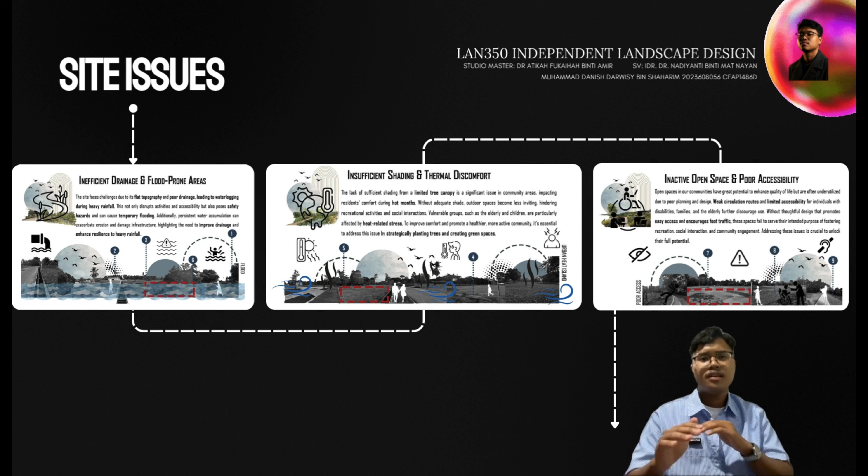Second is insufficient shading and thermal discomfort. The highly limited existing tree canopy leaves community spaces exposed to extreme solar radiation, creating an urban heat island effect that causes heat-related stress to vulnerable groups like children and the elderly.

Third is inactive open space and poor accessibility. Due to a weak historical circulation layout, this public field remains heavily underutilized. The total accessibility for the design feature is neglected for people with disability, preventing this site from fulfilling its social potential.

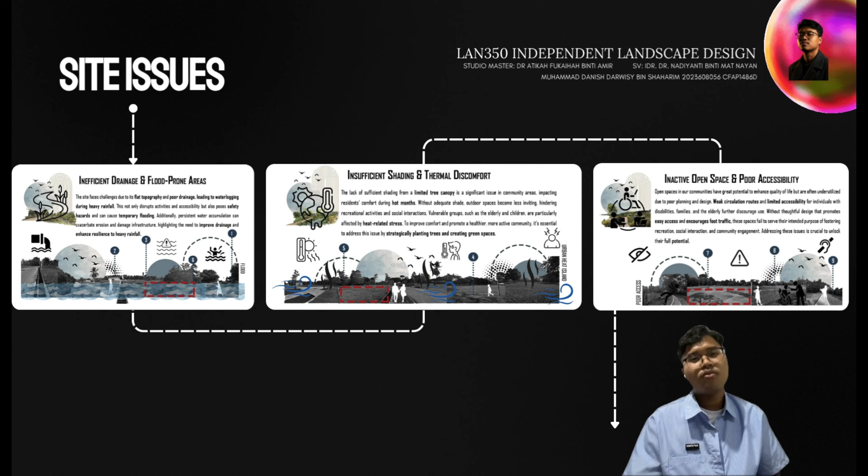Contextualizing these issues, let us look at the site's macro environment. Taman Ujana Peremba is a vital civic open space situated 850 meters from Billion Alor Setar, 450 meters from the Founding Memorial, 400 meters from Masjid Nur Iftikar, and 1.8 km from SMK Ampang.

Demographically, it serves the wider catchment region, which holds an estimated population of 179,200 people. The community makeup is constant at 49.2% male and 50.8% female residents, with ethnic distribution of 72% Malay, 22% Chinese, and 2.4% Bumiputera. Understanding this demographic analysis is critical to why revitalizing this space into an inclusive civic park is so important.

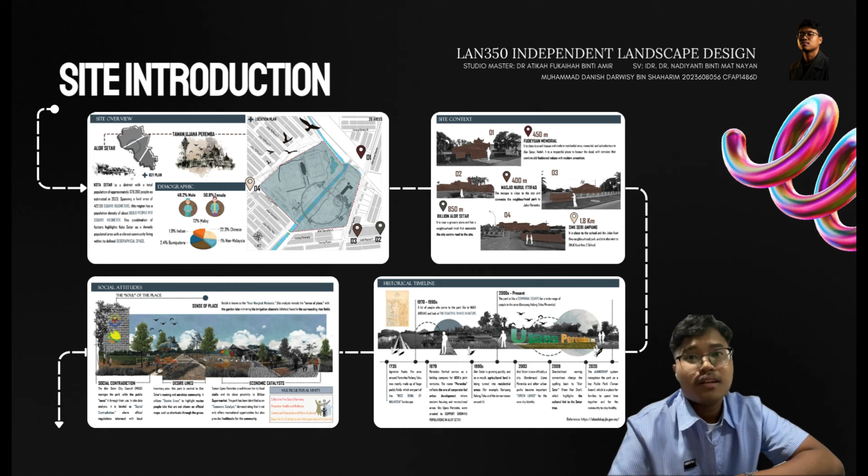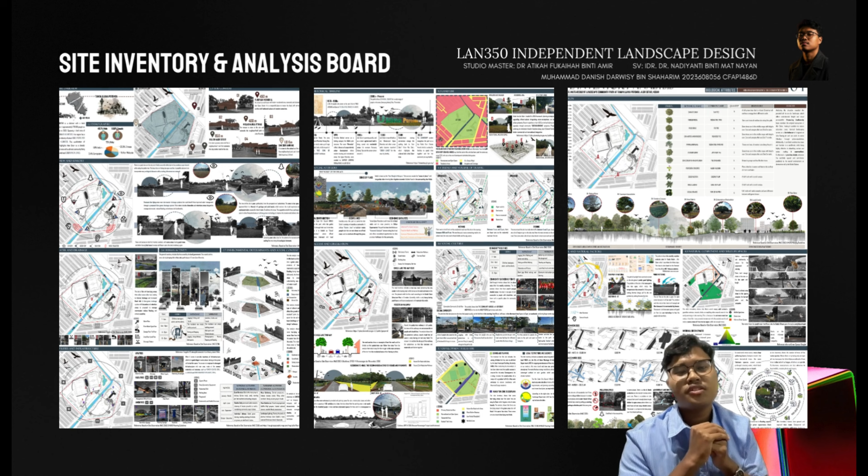Evaluating our site inventory through a structured SWOT analysis, we clarify the design parameters. Strength: the site boasts excellent mature vegetation, including prominent rain trees that provide immediate shade, forming a strong foundation of a forest framework, while an adjacent river canal provides a distinct waterfront identity.

Weakness: internal vulnerabilities include a failing drainage network that cannot handle high surface runoff, causing structural waterlogging, alongside pockets of dead or diseased trees that deteriorate public safety.

Opportunity: we have a major opportunity to integrate nature-based solutions (NBS) and climate resilient technologies, transforming the space into a foundational water education park to raise community environmental literacy.

Threat: external threats include intense monsoon flooding that could destroy park access if not designed to be flood resilient, as well as rising urban heat and insect-borne disease systems.

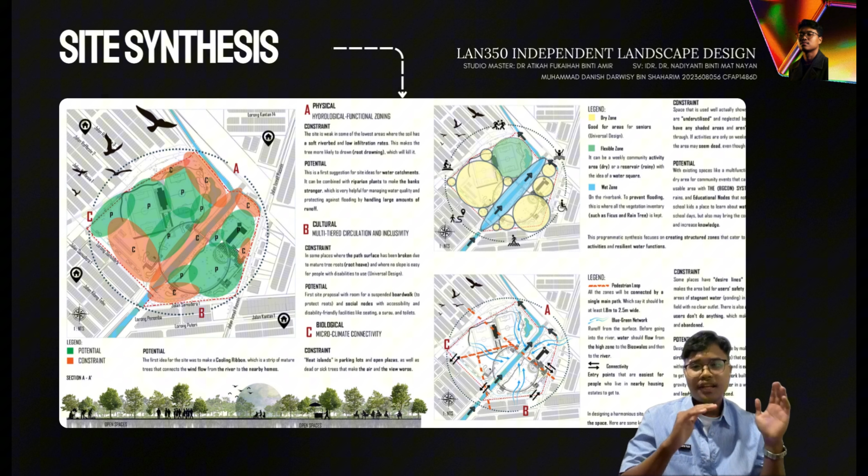Our site synthesis directly bridges this analytical finding with spatial solutions divided into three core pillars. First, the physical and hydrological functional zoning to combat soft riverbed and low infiltration rate that cause flooding. We are dividing this site into three hydrological zones.

The dry zone is designed for universal accessibility. The flexible zone features a water square concept, functioning as a dry community area on weekdays but transitioning into a stormwater reservoir during heavy downpours. The wet zone along the riverbank acts as a flood barrier using flood-bearing trees, ficus, and rain tree.

Second, multi-tiered circulation and accessibility. To counter the existing uneven and poor slope, we have introduced an elevated barrier-free continuous pedestrian path measuring 1.8 to 2.5 meters wide. This integrates an accessible boardwalk to protect mature trees alongside accessible social nodes, public surau, and an accessible toilet.

Third, microclimate connectivity. We have noticed urban heat island effects need a cooling environment. This is addressed by physically orienting finger-like cooling wind corridors from the river straight into the neighboring housing estate.

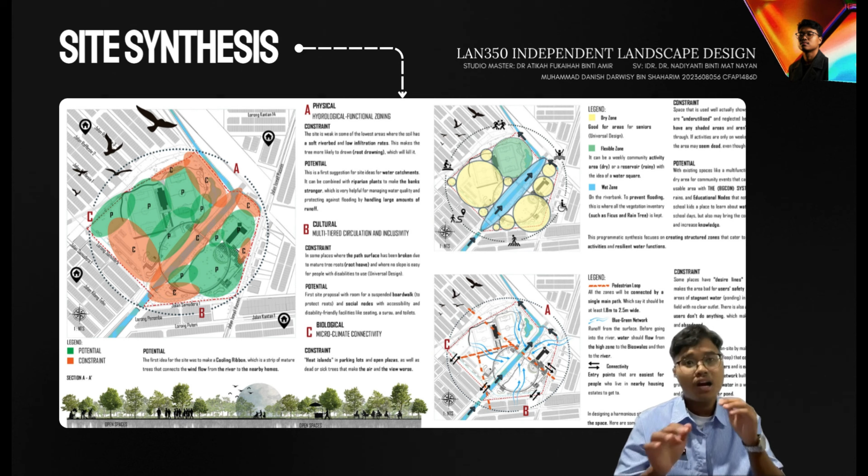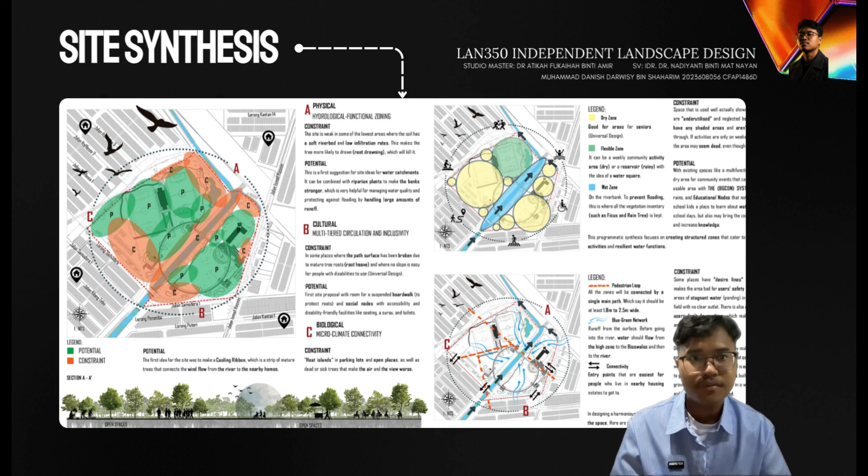Ultimately, this synthesis brings us to our preliminary design concept. The fundamental project aims to establish a resilient community park driven by a blue-green cooling and drainage network, or BGCDN. This design framework adopts nature-based solutions aligned directly with the Institute of Landscape Architects Malaysia (ILAM) guidelines to greater professional ecology interaction.

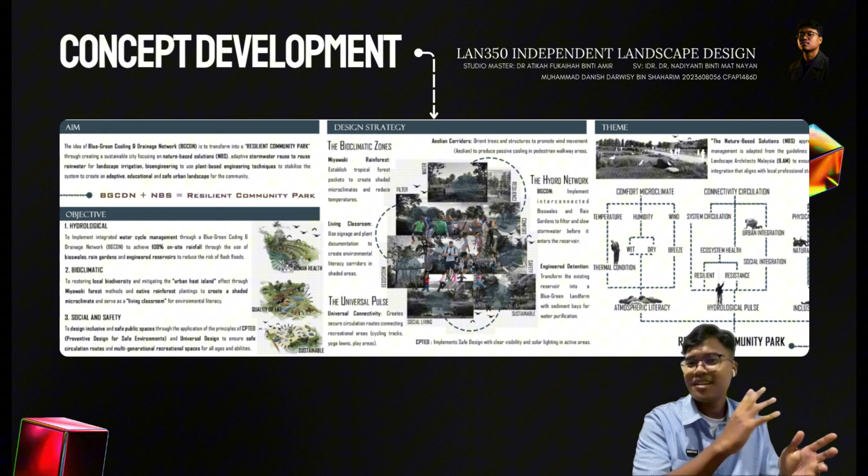Our central design concept is defined as the Reticulated Hydrobioclimatic Pulse. Let us break down its core components.

Reticulated represents the connectivity and connection infrastructure where no zone is isolated. Hydro addresses the integrated water cycle management, targeting 100% on-site rainfall capture using swales, rain gardens, and sediment retention ponds.

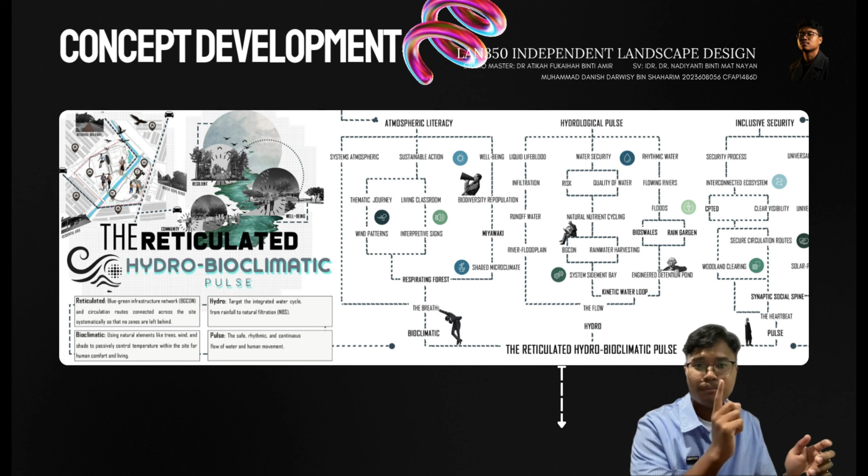Bioclimatic leverages native rainforest pockets and Aeolian wind corridors to passively cool the park, lowering local temperature. Lastly, Pulse embodies a continuous, safe, rhythmic flow of both water and human movement across generations.

This is specialized and transitions into three structural layers: the breathe layer, which forms the respirating forest and shaded microclimate; the flow layer, which manages the kinetic water loop; and the heartbeat layer, which has a synaptic social spine complete with solar power facilities, universal play lawn, and complete community facilities.

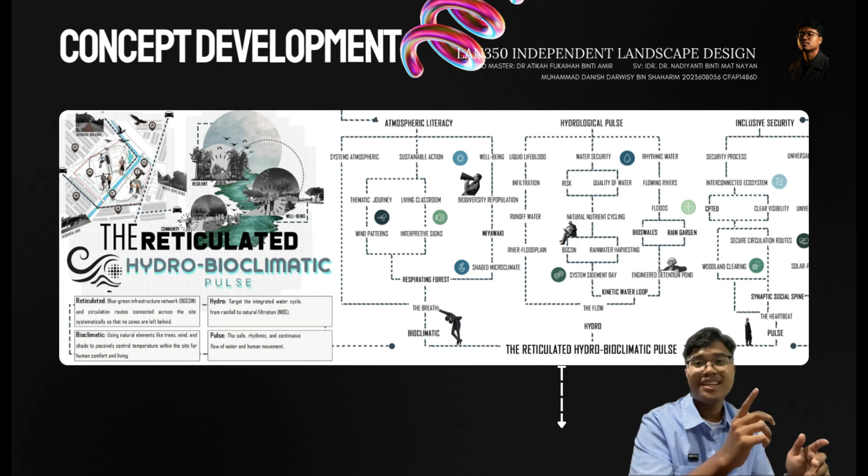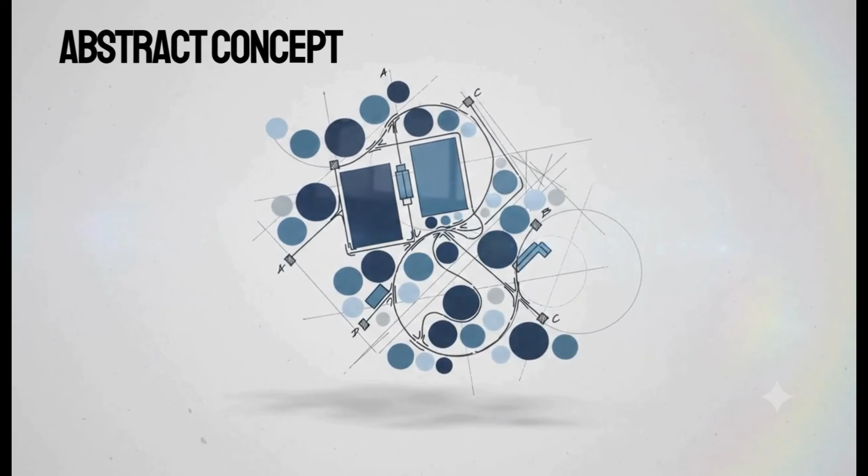Here is the master plan rendered at the scale of 1:1750, pairing with the abstract flow diagram highlighting the major entrance, pedestrian path, and vertical boardwalk connectivity. Moving on from the macro concept and master plan.

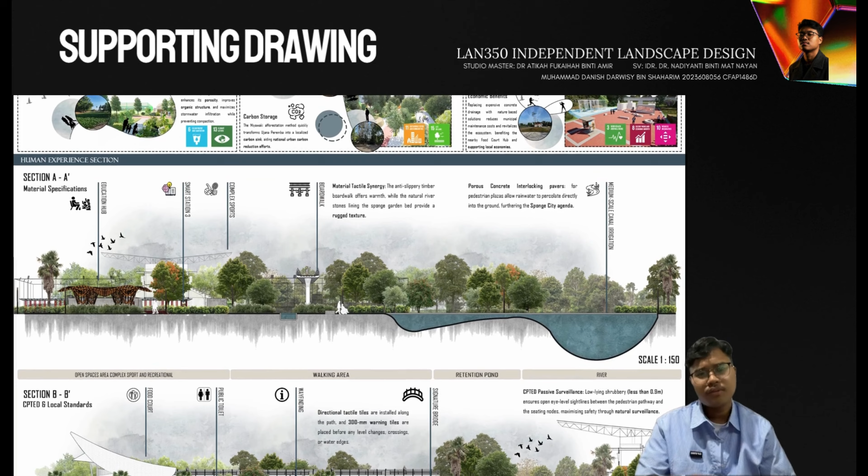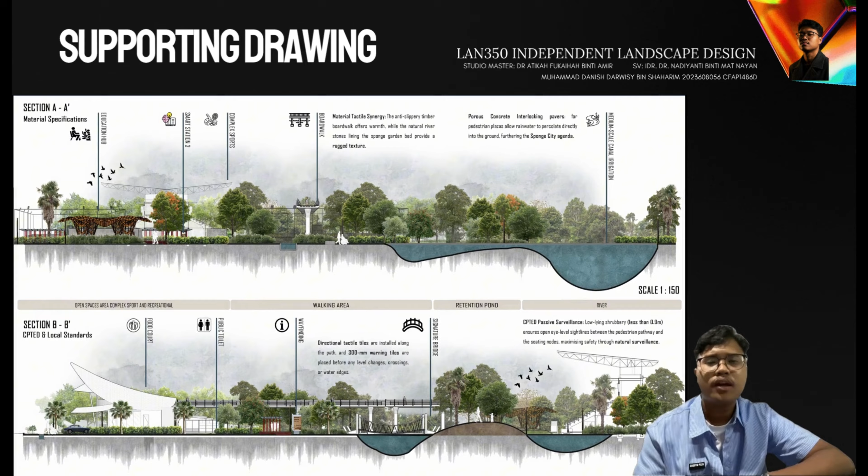This board details the supporting technical drawings, validated ecology performance and human experience. At the top, the ecology performance and spatial benefit metrics illustrate how the design is systemically hydrologically resilient through sustainable water management, maximizing microclimate comfort via targeted urban cooling, and generating tangible socio-economic value via a deeply integrated green network. The human experience section is rendered at 1:150 scale and highlights external material and safety specification.

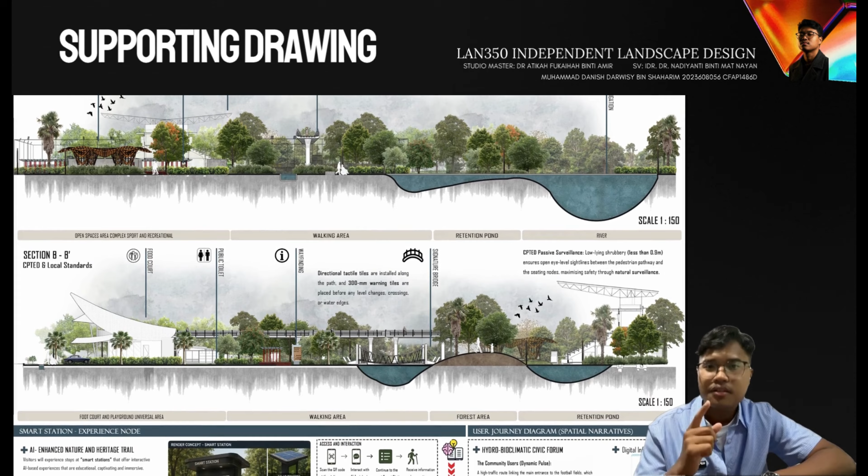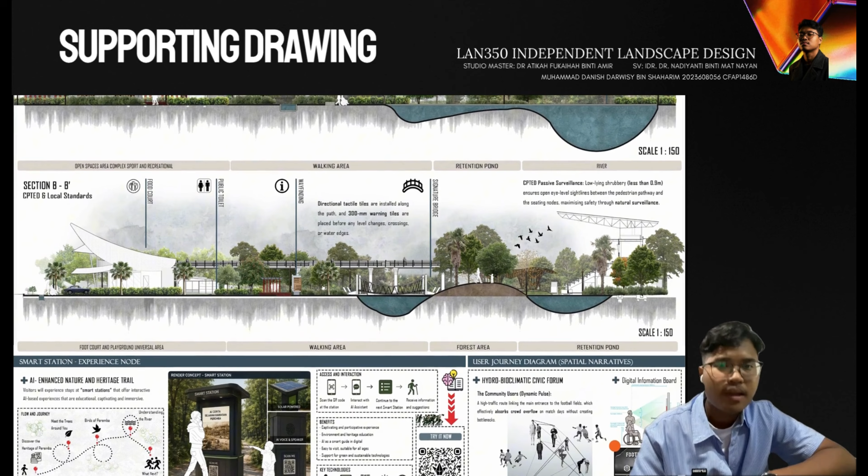Section A demonstrates material tactile synergy. Here we are introducing anti-slip timber boardwalk paving over porous concrete interlocking pavement at pedestrian places, directly supporting the Sponge City agenda by facilitating high water infiltration.

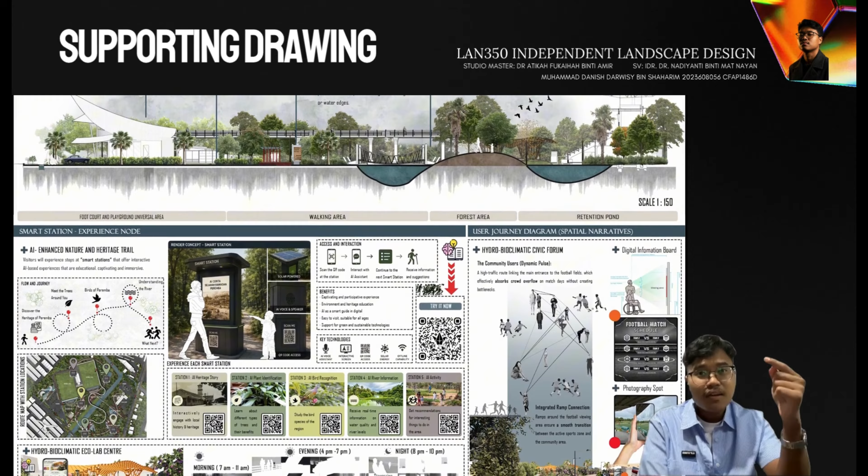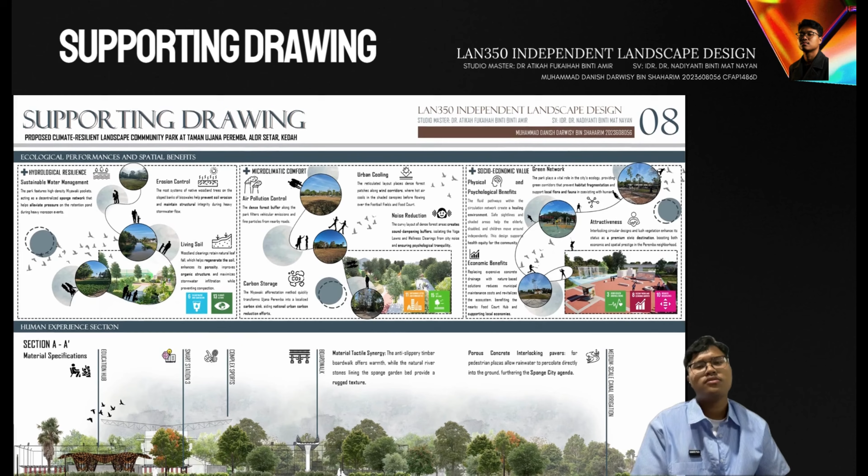Section B enforces strict CPTED and local standards. We have integrated 300 millimeter reduction tactile warning tiles right before level changes and water edges. Furthermore, we maintain an expected 1.2 meter clear eye-level visibility line between pathway and seating nodes, maximizing natural surveillance and community safety. Finally, the bottom panel showcases our smart station experience nodes and user journey diagram.

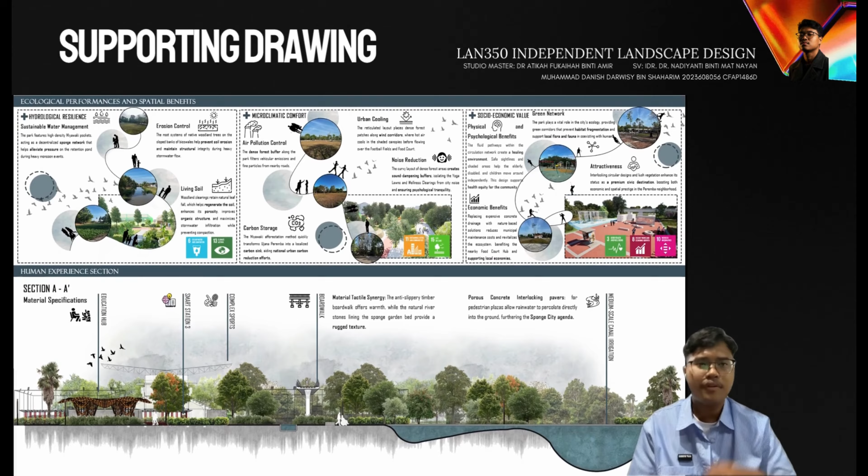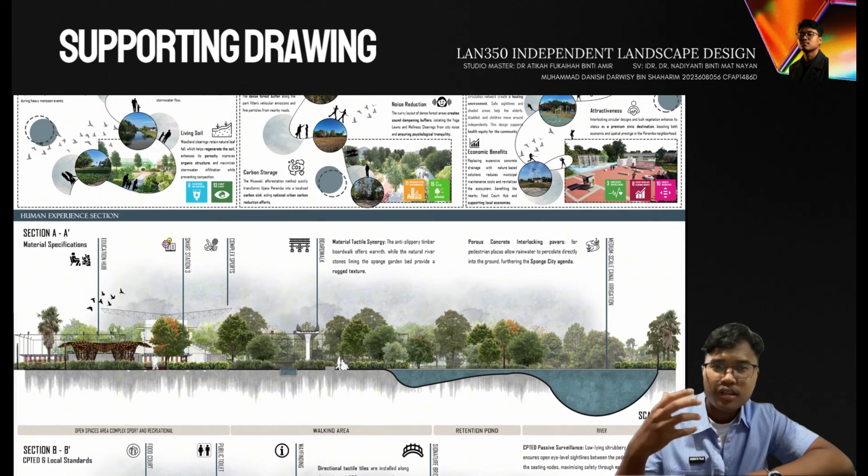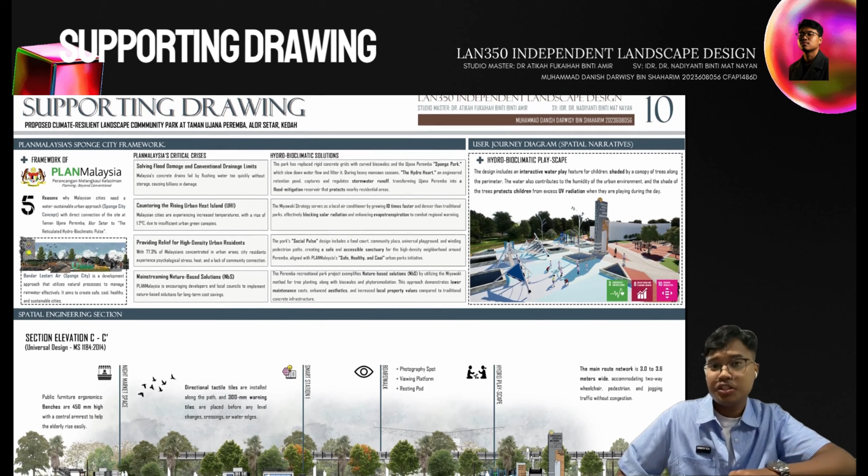We explicitly align the park design with the PLANMalaysia Sponge City framework. This strategy framework directly addresses conventional drainage limits and counters the rising urban heat island effect through adaptive nature-based solutions (NBS).

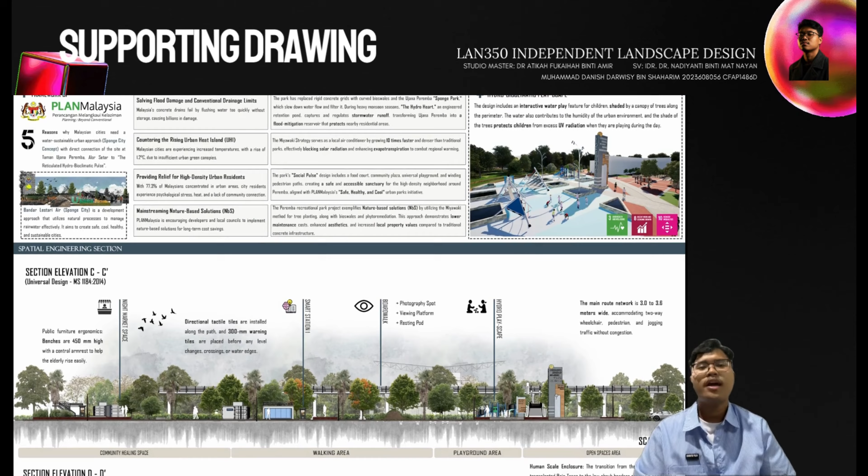To the right, the hydrobioclimatic landscape transitions this framework into a safe, interactive water play zone for children, shaded by tree canopy to protect users from solar radiation.

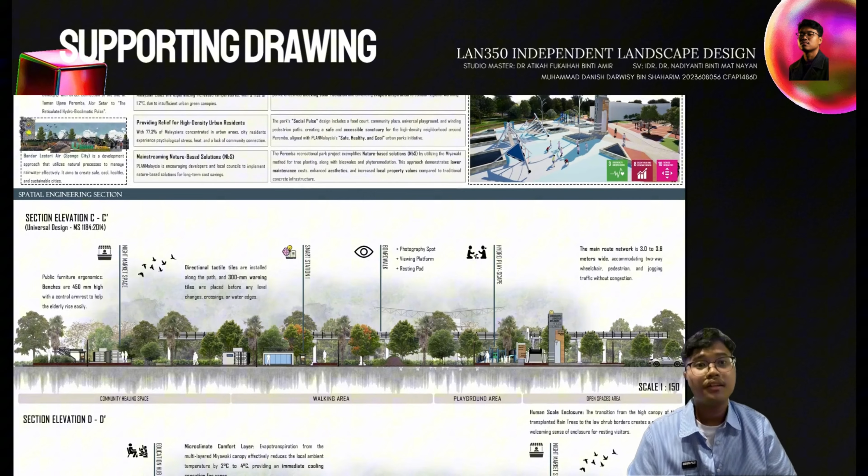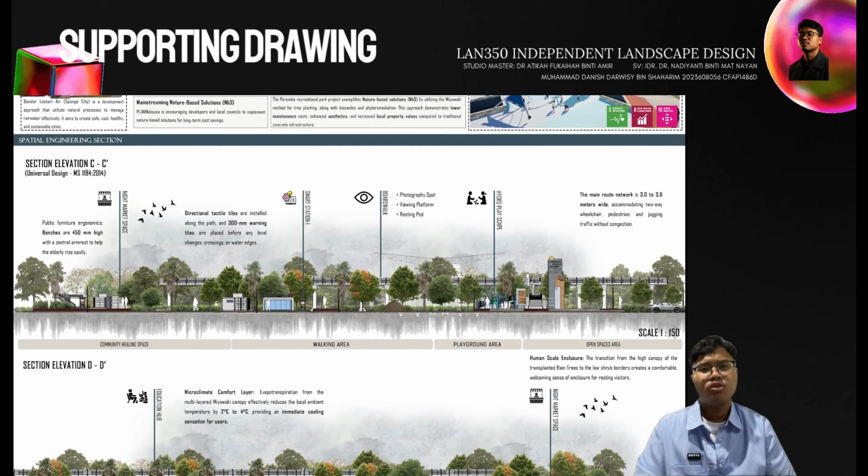The spatial engineering section breaks this down into excellent technical dimensions. Section elevation C demonstrates a street compliant with Universal Design Standard MS 1184:2014. The pedestrian shaded pathway network is designed at a generous 3.0 to 3.6 meter width to provide concurrent access between wheelchair, pedestrian, and jogging users.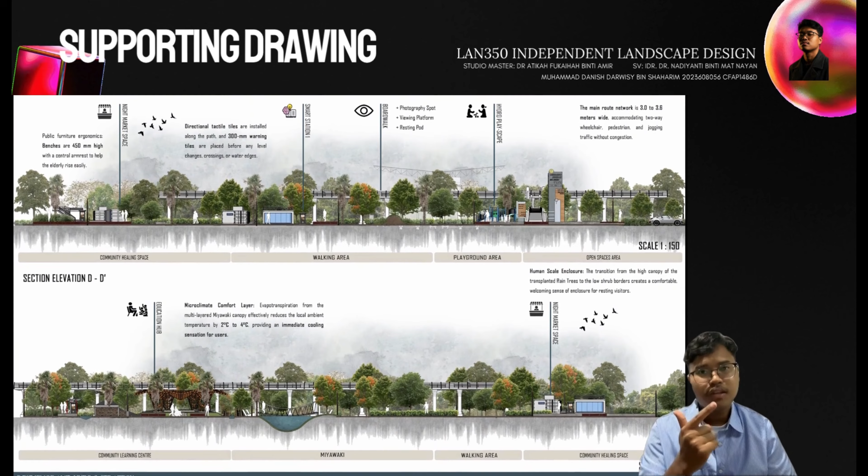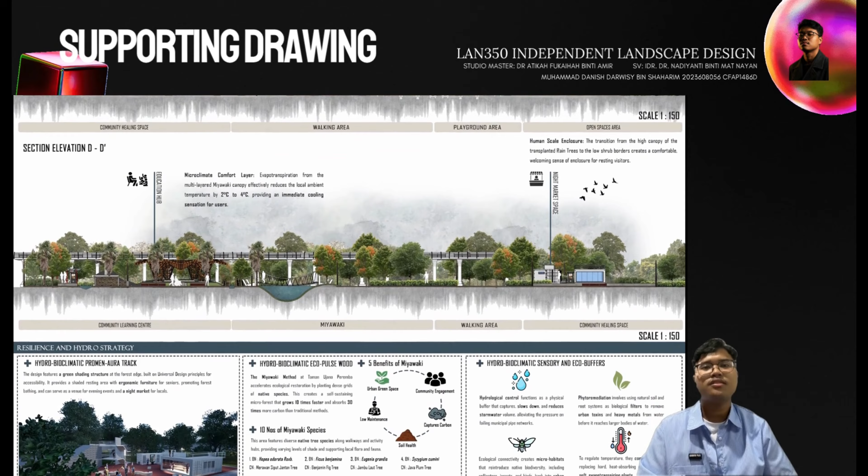This is followed by 450 mm high ergonomic public seating integrated directly with tactile paving. Section Elevation D showcases a multi-layer microclimate comfort layer, paving a high tree canopy at human scale, enclosed by low shrubs. This design successfully reduces local temperature by 2 to 4 degrees Celsius for immediate thermal comfort.

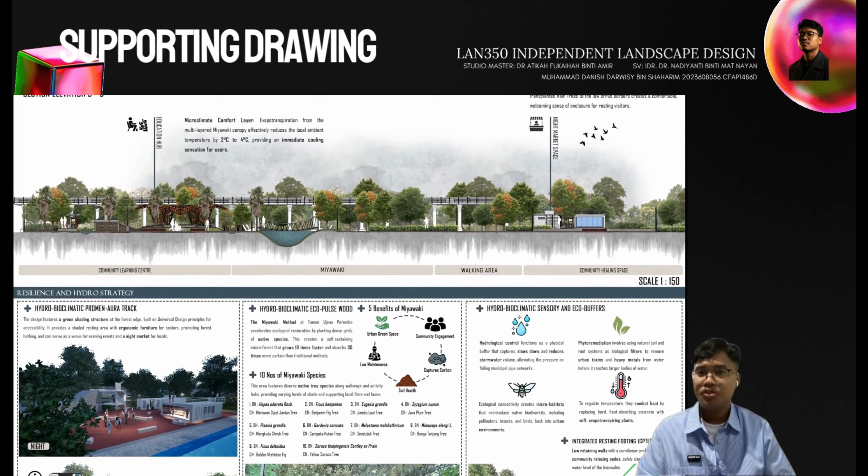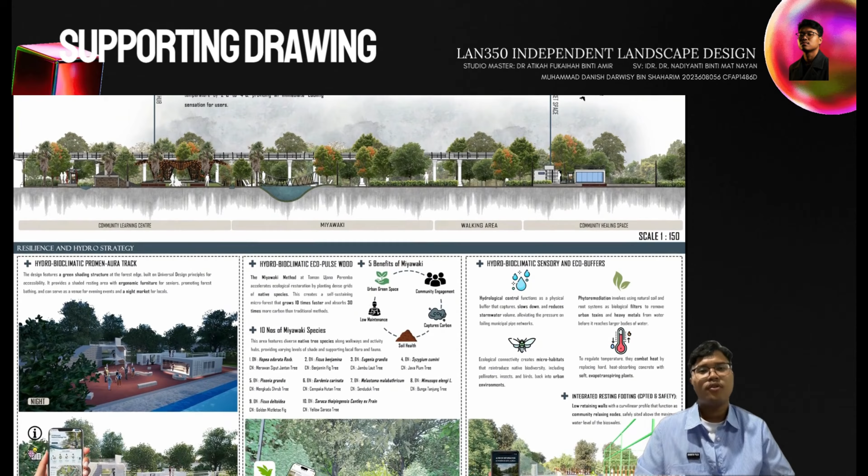Finally, our resilient hydro strategy introduces the bioclimatic eco-pulse wood, implementing the species using the Miyawaki method with 10 selected native species. This pocket forest grows 10 times faster and absorbs 30 times more carbon.

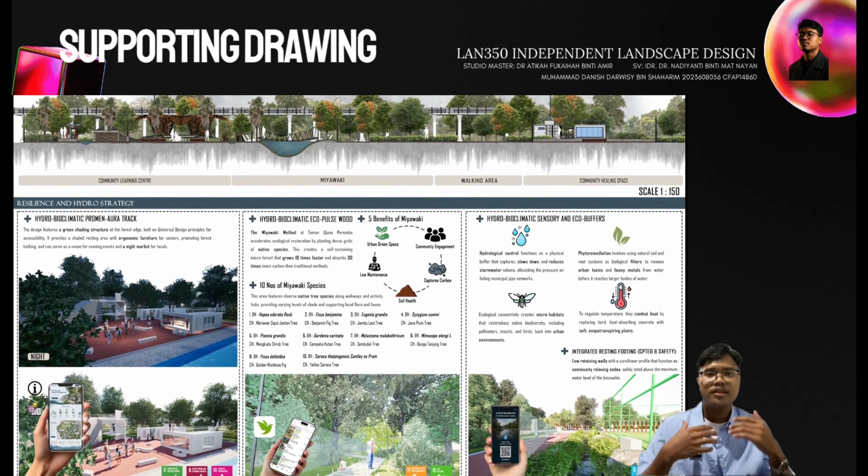Paving the way to a pertinent eco buffer, naturally filtering urban toxins and heavy metals for cleaner water, along with smart CPTED security lighting, we deliver a highly sustainable, resilient and safe landscape infrastructure for our area.

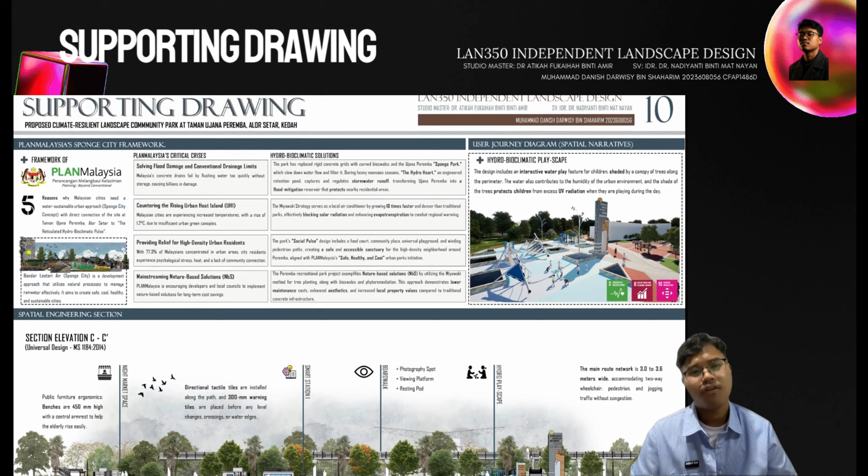Concluding the presentation, this board outlines the planting inspiration, translating the strategic climate resilient concept into a living soft-scape reality. Section Elevation E focuses on the sensory trail at 1:100 scale, uniquely engineered to activate all five human senses within the healing Miyawaki zone.

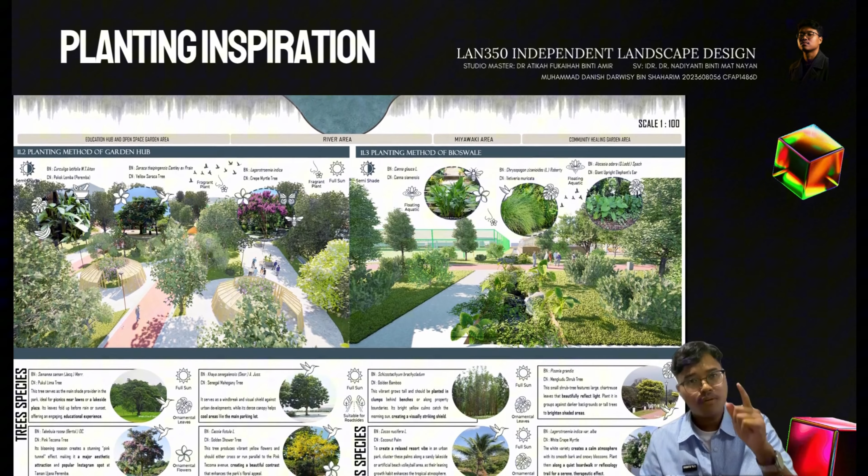It introduces bird and butterfly interactive flowering and scented plants, alongside structured leaf, aromatic, spike and bee interactive ornamental flowers to enrich touch, taste and smell.

In the middle tier, we detail the operational planting methodology. The planting method of garden hub clusters, deep canopy trees and flash species establishes an inviting micro-community comfortable for human interaction in both sun and semi-shade.

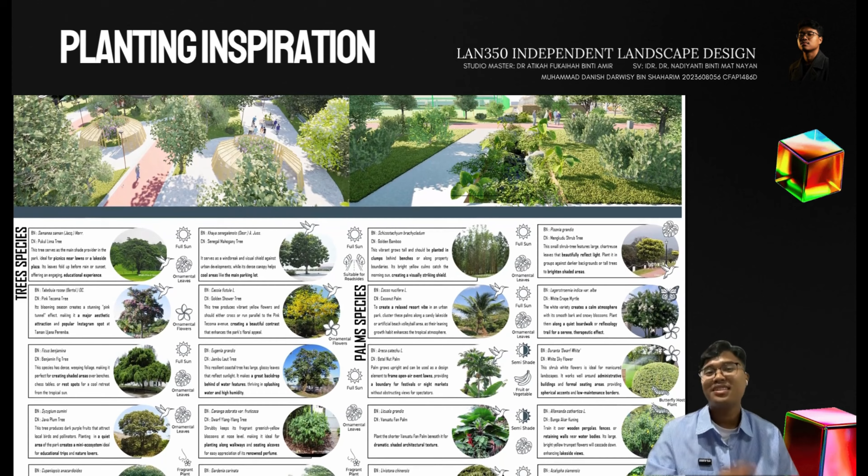The planting method of the bioswales strategically incorporates floating aquatic plants and mitigating living layers to maximize natural filtering of stormwater before its recharge and discharge.

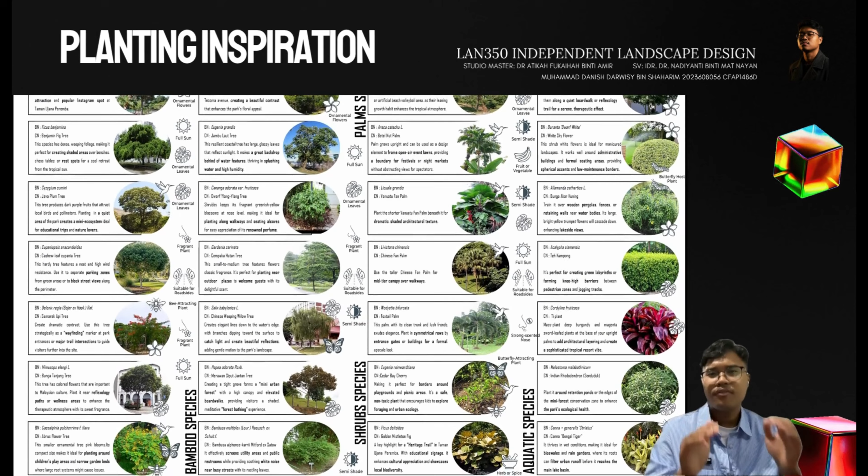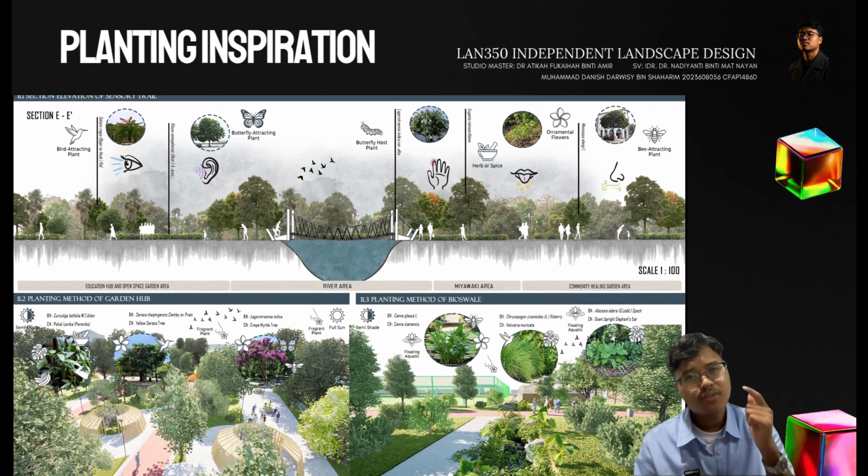This comprehensive strategy is created by 23 metrics dividing the species of trees, palms, bamboo, shrubs, and aquatic species. From the cooling shade of Samanea saman to heavy metal filtering aquatic plants, this soft-scape selection fully brings to life the reticulated bioclimatic pulse.